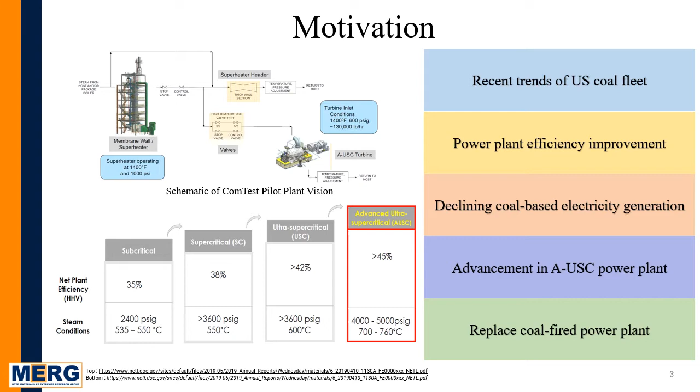As we shift through the gears from subcritical to supercritical to ultra-supercritical, we are now talking about advanced ultra-supercritical power plants. We are pushing the limits of stress and temperature, and in turn enhancing efficiency to a great degree. So to enhance the efficiency of existing power plants, we have to go through some steps.

We have to do uncertainty quantification of the current plants and FEA modeling of the system for a truer representation of the physical system. We have to rapidly qualify newer candidate alloys to withstand extreme conditions. To reduce the cost and time for safety inspections, we have to enhance reliability to a great degree, along with lifetime extension programs.

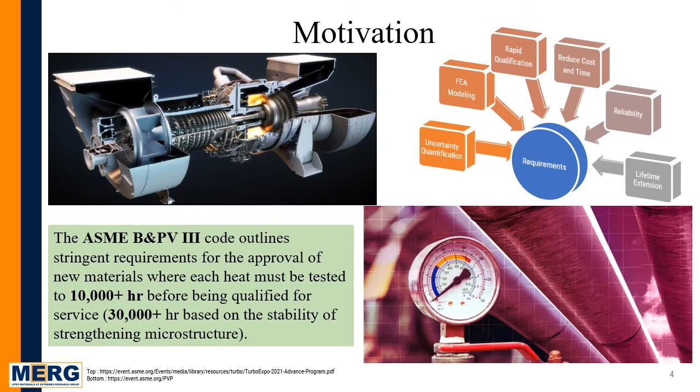For newer candidate alloys to be put into service, the ASME Boiler and Pressure Vessel Code requires that new materials must go through 10,000 plus hours of testing before being qualified for service. This is not impossible, but it is improbable for most cases, if not all.

When in service, power plant materials are susceptible to creep-induced failure. When creep is extrapolated to low stress and high temperature regimes, we see substantial scattering, and this scattering in rupture life can persist across logarithmic decades. To explain this phenomena, we throw an inflated safety factor into the mix, saying this material is going to fail between 12 years and 24 years, which is huge.

So there are a few questions that need to be answered. Can we improve the creep prediction technology? Can we rapidly qualify newer candidate alloys? Can we capture these uncertainties that impact the creep resistance of a material? In this study, we aim to answer some of those questions.

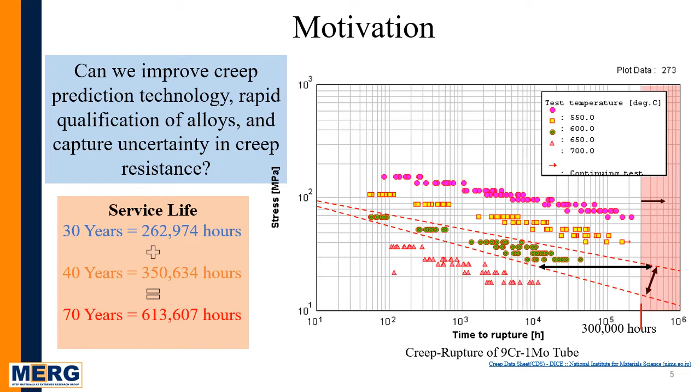In this work, we adopted a reduced order modeling approach to rapidly qualify the creep properties of a complex geometry. Reduced order models are simplifications of high fidelity complex models. Here we take a very simple 1D geometry and apply all the creep properties along with testing conditions to do deterministic simulations, comparing and validating the creep damage model against prior creep data.

Now we assess the different sources of uncertainty that affect creep. We establish probability distribution functions for each source of uncertainty, and those PDFs are fed into the finite element settings to do numerous probabilistic predictions. Since the geometry is simple, it takes very little time to simulate numerous times, and very little computational time and memory.

Now the problem is reduced from these numerous cases to just the extremum cases, mean cases, or the best and worst cases, and those cases are taken to the more complex 2D and 3D geometry. As the element number and node number increase, this 2D and 3D geometry takes a huge amount of time for a single deterministic prediction, let alone numerous probabilistic predictions.

So these numerous probabilistic predictions are reduced to just simple reduced order modeling predictions, but we are still retrieving the scatter bands established by these probabilistic predictions.

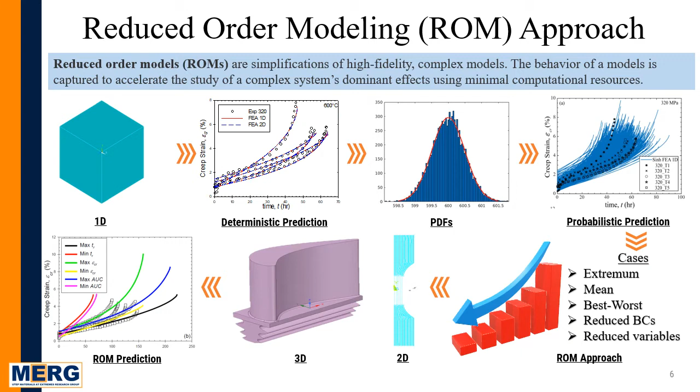For this study, we are taking 304 stainless steel, and the replicated creep data are gathered from the literature. The experimental scattering of this data is highlighted in this normalized minimum creep strain rate and stress rupture plot. We can see that the replicated creep tests show substantial scattering.

To quantify this scattering, we see that the minimum creep strain rate coefficient of variation can go as high as 34%. For the rupture time, the coefficient of variation could be as high as 16%. So this considerable scattering for the replicated creep test needs addressing.

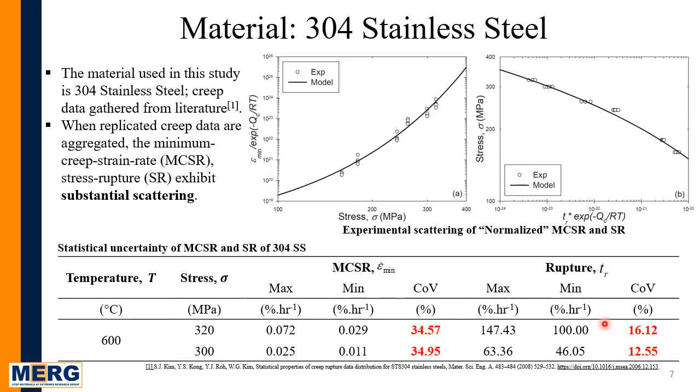Sine hyperbolic creep damage model has been chosen for this study. This CDM-based constitutive model consists of coupled creep strain rate and damage rate equations. The stress and temperature dependency are embedded into this rate-based equation, and these equations could be further simplified for the isothermal condition by taking this Arrhenius part equivalent to 1.

All the material constants are listed in this table, where few constants are fixed and others show stress and temperature dependency.

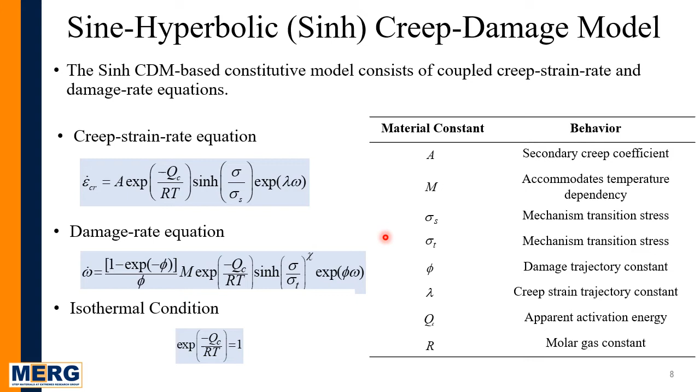The finite element validation simulations are conducted for both the 1D and 2D model. To do so, the sine hyperbolic model rate-based equations are programmed into the ANSYS finite element through updating a user creep subroutine. The validation simulations are conducted up to the rupture time. For the 1D model, a single 8-noded element, and for the 2D model, plane 183 8-noded element are chosen.

The equivalent stress and damage at rupture for the 2D model are shown in these two figures.

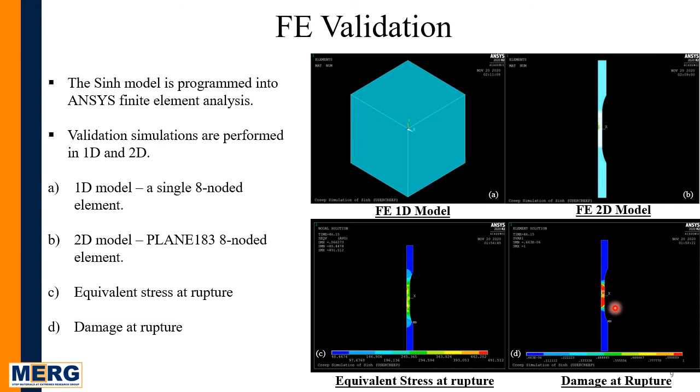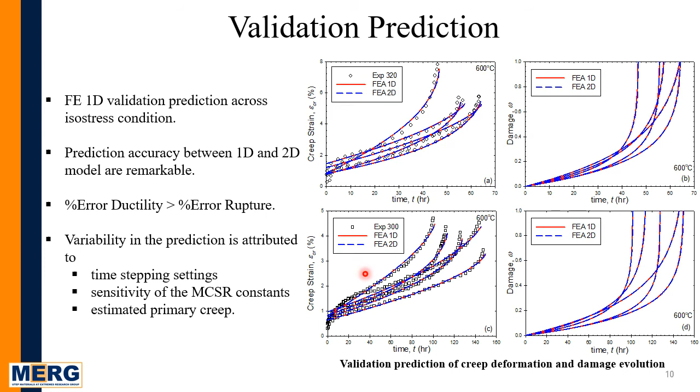Now we can assess the sources of uncertainties that are going to impact the creep resistance of a material. These sources of uncertainties are subdivided into three broad categories. Number one, the boundary condition related uncertainties, and this includes service stress and temperature and test stress and temperature oscillations.

As we know, the power plant operates well below its design stress and temperature, so stress and temperature fluctuations are more observed in the power plant settings. While in a test setup, the ASTM standard has its own standards for the stress and temperature fluctuations.

The second subdivision is the material properties related uncertainties, and that includes the variation in the chemistry and the thermomechanical processing related uncertainties. And the final subdivision includes the surface and subsurface defects or pre-existing defect related uncertainties.

Because for every sample, we are unaware of the fact what kind of loading history that particular element went under in its lifetime, it always comes with some sort of pre-existing defects.

Other sources of uncertainties include the test procedure error, the geometric parameters uncertainties, and the operator error. So all these uncertainties combine together to impact the creep resistance of a material.

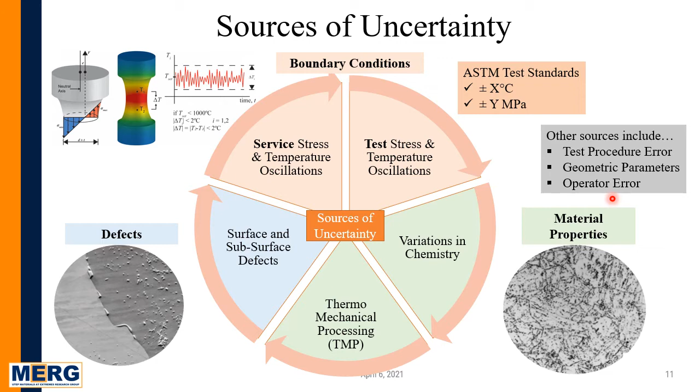In this study, testing stress and temperature fluctuations are modeled by employing ASTM E8 and ASTM E139 standards. And the PDFs of the pre-existing defects and model constants are set by the Anderson-Darling goodness of fit test.

In this table, the sources of uncertainties are listed where stress and temperature are modeled by the normal Gaussian distribution. The uncertainty of initial damage is modeled by exponential distribution, and other model constants are modeled by log normal distribution.

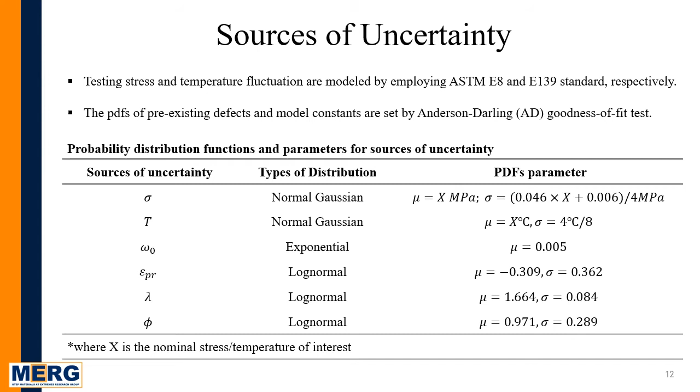These are the distribution plots for each of the sources of uncertainties. These plots are shown for a particular case of 320 megapascal and 600 degrees centigrade.

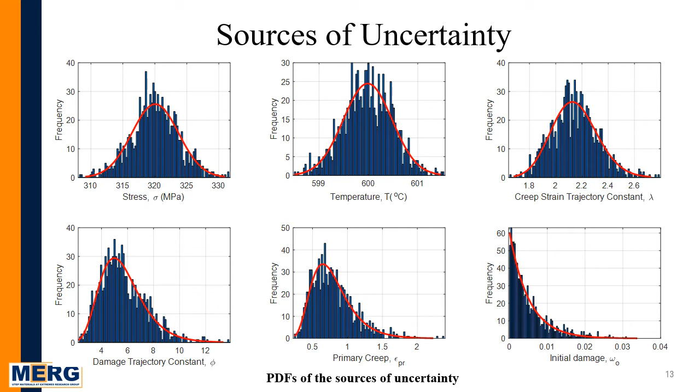This slide contains the probabilistic prediction for this 1D model. So we took the 1D model, updated the user creep in the finite element settings. Then we use a probabilistic tool, NESSUS, to map the random responses for each of the sources of uncertainties into the ANSYS input deck. Then the simulations are being conducted in ANSYS.

Then the results are being processed through a MATLAB subroutine, and all these probabilistic predictions are done for the creep deformation and damage evolution.

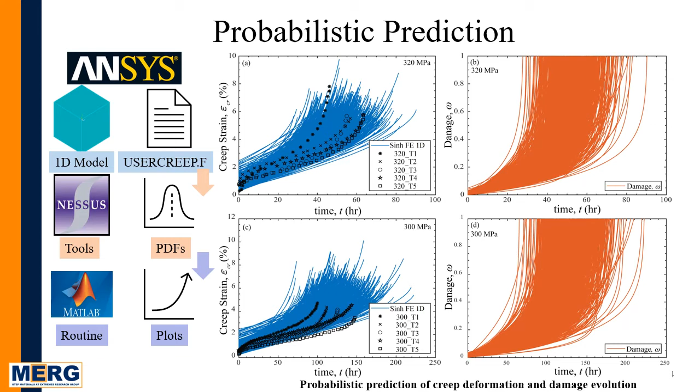Creep deformation, damage evolution, and stress rupture predictions are shown in this slide. The creep deformation prediction encapsulates the experimental outliers across isostress condition.

The ductility prediction seems to agree more at the higher stress, while the rupture prediction is observed to vary more at the lower stress regime, conforming to the empirical creep theory. The damage is always unity at rupture, while the damage rate remains finite at rupture.

The stress rupture prediction shows the prediction encapsulating the experimental outer bounds, while the 95% upper and lower confidence bounds are shown. And the confidence bounds seem to be expanding at the lower stress regime.

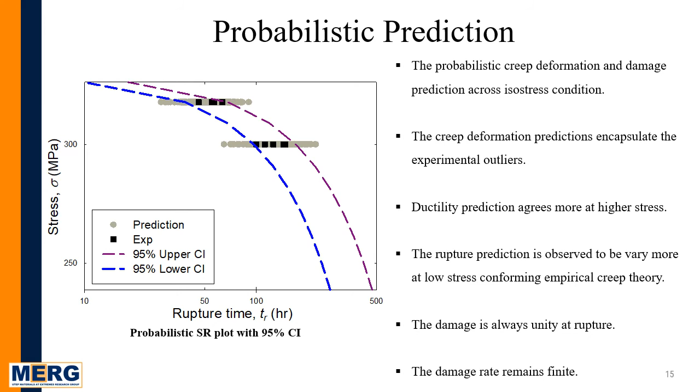The quantitative analysis of these probabilistic predictions is done across three categories: ductility, rupture, and the area under the creep curves. The ductility percent coefficient of variation seems to be the smallest among the comparable categories, and the standard deviation and the coefficient of variation is projected to be increasing at the lowest stress regime.

The scattering of the area under the creep curve seems to be the highest, while on the other end of the spectrum, the scattering of the ductility seems to be the smallest. And the 95% confidence interval is observed to be within 2 standard deviations of the mean in each case.

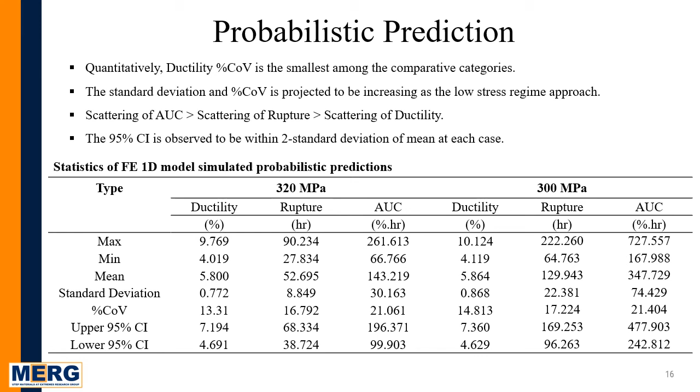At this point, we are employing the reduced order modeling approach. We take the extremum cases from the probabilistic prediction from the 1D model, and those extremum cases are retrieved for the 2D model, with prediction done by the reduced order modeling approach. Those numerous probabilistic predictions are reduced to just 6 plots, but we still retrieve the scatter bands established by the 1D predictions.

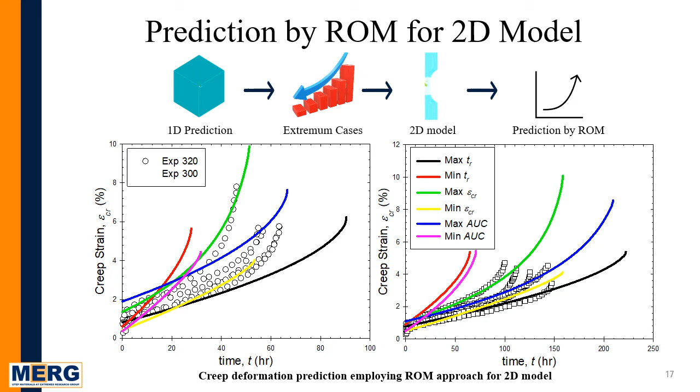Deformation prediction of the 2D model based on the ROM approach is shown. We take the extremum cases of ductility, rupture, and area under the creep curves from the 1D model. Those material constants and testing conditions are retrieved from the input deck and applied for the 2D model, and the predictions are conducted.

The FE 2D model predictions show the error between rupture, ductility, and area under creep curves as low as 1.265% or less. But the most meaningful part of this study is that we are reducing those 1000 1D model creep curves to just 6 2D model creep curves.

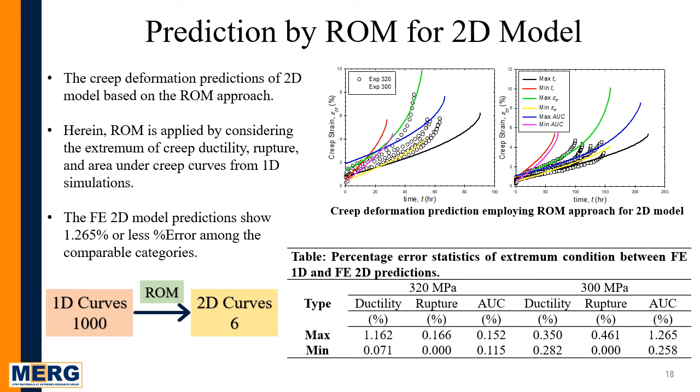Now I'm going to discuss the advantages and limitations of the ROM approach. The premium outcomes from a large set of experimentation are the extremum cases, the mean cases, or the best and worst cases. The ROM enables us to establish the scatter band for the complex model, and it potentially reduces significant computational time, space, and memory. The prediction accuracy for the 2D model extends confidence to simulate a 3D model such as a turbine blade model, and it's easy to replicate the truer representation of the physical system.

On the other end of the spectrum, we have some limitations. The ROM approach is yet to be proven across isotherm conditions, and it also needs to be applied to a larger data set of austenitic steel and candidate alloys to further validate this approach.

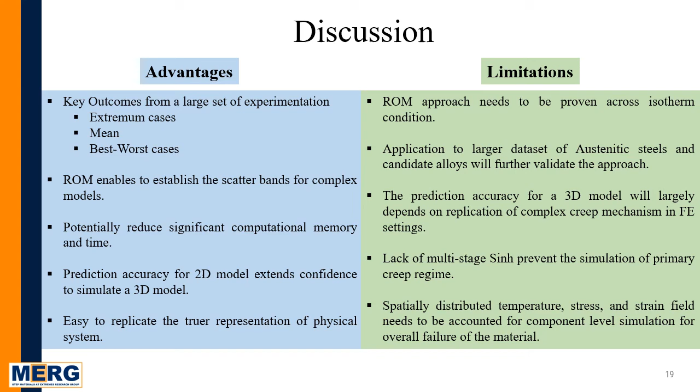The prediction accuracy for the 3D model will largely depend on the replication of complex creep mechanisms in the finite element settings, and we'll need a multi-stage approach that will simulate the primary creep regime as well. Finally, the spatially distributed temperature, stress, and strain field needs to be accounted for component level simulation for the overall failure of the materials.

The goal of this study was to introduce the reduced order modeling approach for a complex model to reduce computational time and memory. To that end, this study leads to the following insights. We can see that validation simulation for the finite element 1D and 2D model shows remarkable accuracy with the experiment. The probabilistic prediction for the 1D model, in most cases, shows the creep deformation, damage, and rupture prediction remains within 2 standard deviations of the mean.

Also, the stress rupture scatter bands were observed to be increasing at the lowest stress condition, complying with the empirical creep theory. When the extremum cases are retrieved from the 1D model simulation and applied for the 2D model, the simulation shows satisfactory agreement with the prediction, and the observed percent error across comparable categories is low at 1.265% or less. Applying the ROM approach, scatter bands of the creep deformation, damage, and rupture is established for the 2D model with minimal loss of accuracy.

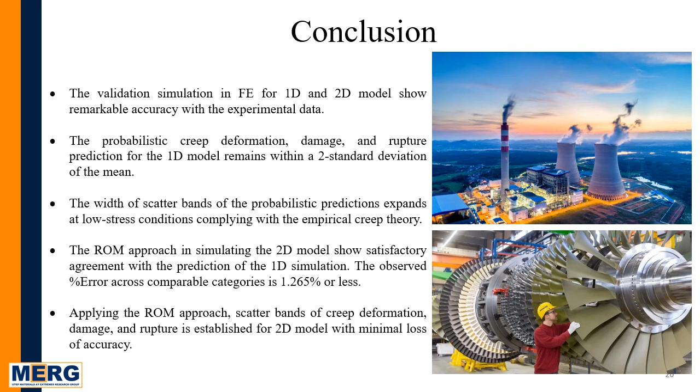At this point, I'm going to recommend some future work to further improve this ROM approach. Load eccentricity will be incorporated within the finite element settings to explain the misalignment between the load cell and the specimen; temporal uncertainty, that is the time-dependent stress and temperature variability for the entire duration of the creep test; and spatial uncertainty, that is the spatially distributed pre-existing damage, stress, temperature, and strain fields.

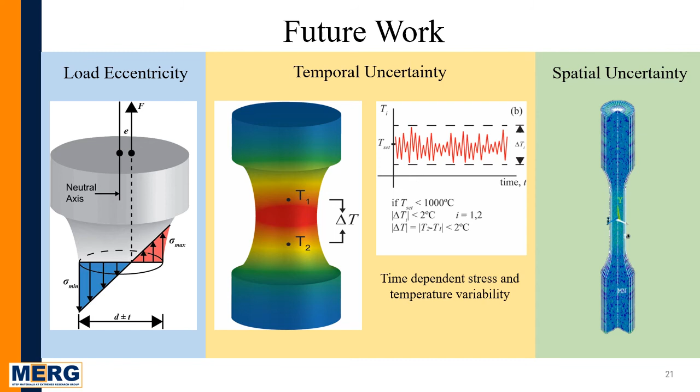In this slide, I'll show you the spatially distributed initial damage field. Spatial uncertainty is a parameter whose magnitude and position is uncertain, and it can be truly random and expressed as local distributions, such as spatially uncertain defects near the surface of a specimen. This spatial uncertainty can be of initial damage, material properties, temperature, stress, strain fields, etc. These demo simulations show a truly randomly distributed initial damage that evolves from an initial number to unity at the rupture of the element.